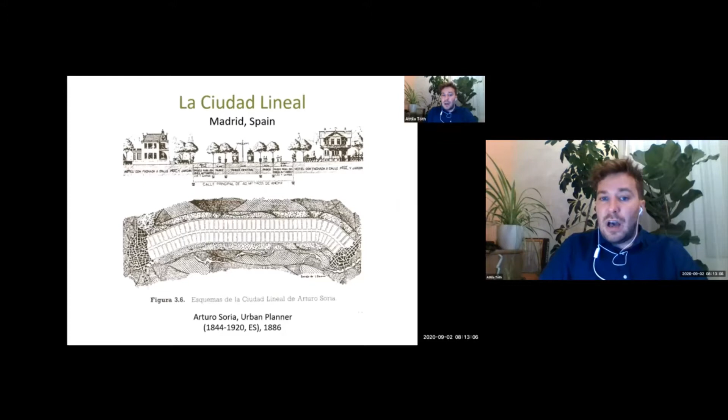The conception of greening cities reaches back to conceptions like La Ciudad Lineal, where you can see green strips and green lines along which streetscapes have been organized.

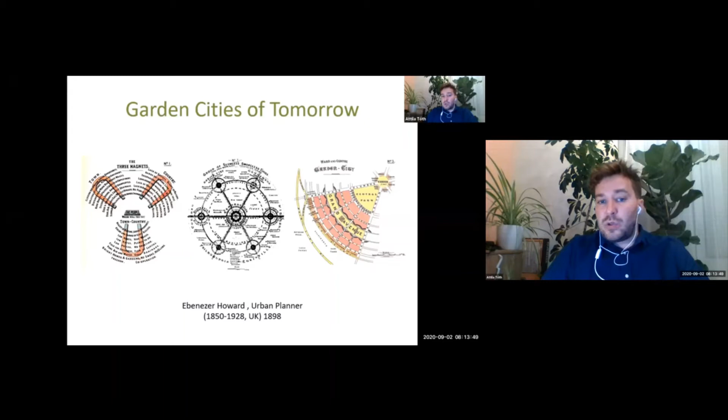Perhaps a little more well-known is the Garden Cities of Tomorrow concept by Ebenezer Howard, an urban planner active in the late 19th century, who came up with the conception of Garden Cities of Tomorrow. This tried to link the qualities of the rural with the qualities of the urban, and the city model included allotments, a grand green avenue, and the central park. So the city was linked with rural areas, which we shall understand as green spaces and open spaces.

This concentric way of planning or modeling cities was quite popular in most European metropolitan cities. For instance, Vienna had this green ring along it, which had a protection meaning before in medieval times. In modern times, when this protection function was gone, concepts of what to do with this area arose, and this made way for the Ringstrasse, the famous green ring, all along the historical city core.

London was similar. There was a plan of the green belts along London, and several green belts divided different urban strips of the city.

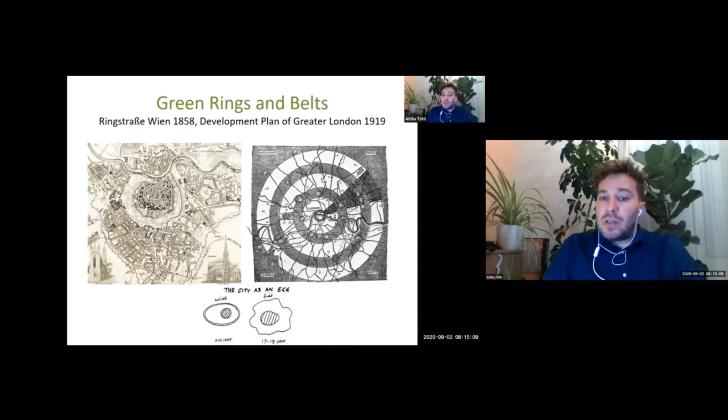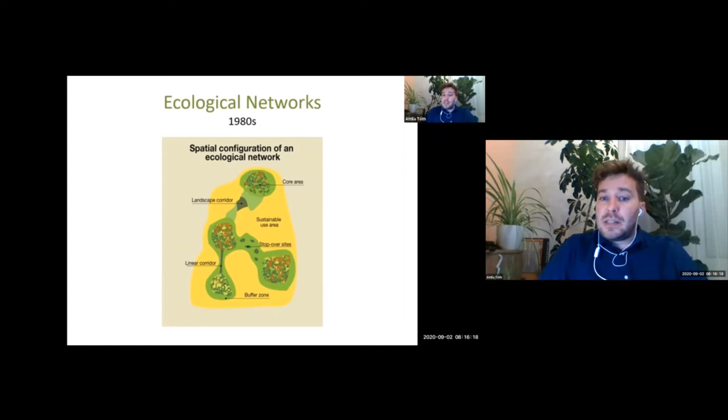Later, in the second half of the 20th century, it was the period of environmentalism and different environmental movements. In this period, the so-called ecological networks developed. For instance, in Czechoslovakia, there was landscape ecological planning, or the territorial system of ecological stability. The ecological network conception was more or less international, based on different core areas and landscape corridors, but the significance of this approach is more in ecology.

A very important aspect of green infrastructure in today's understanding is the multifunctionality. So it's not only about ecology, but it has a very strong social dimension and a very strong economic dimension.

We have a green infrastructure strategy at the EU level, which is linked with all other strategies and policies, for instance also with the Common Agricultural Policy or the new EU Biodiversity Strategy, and more recently the so-called Green Deal, which is an economic concept based on green or environmental approaches to renew Europe in a rather sustainable and green way. This conception is very well linked with more modern approaches like nature-based solutions, which we shall understand as part of a wider image, which should be green infrastructure. And all these provide ecosystem services. So these three terms are very much buzzwords today for the European Commission and also for national authorities.

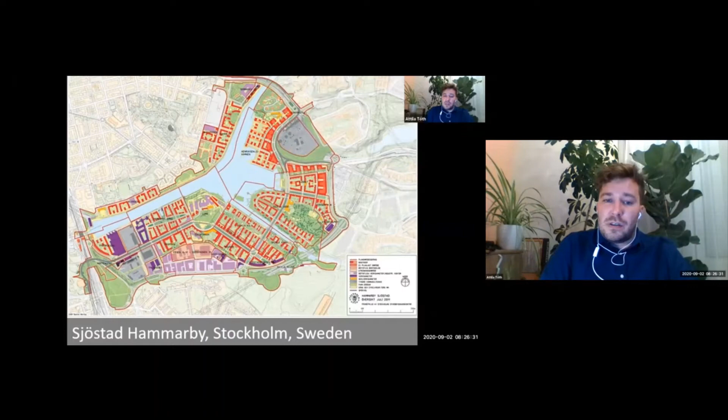This is very attractive for urban citizens who can live just at the water. And of course, this development caused the price and value of the residential areas and flats located in the Sjöstad to become very high and very good for the owners.

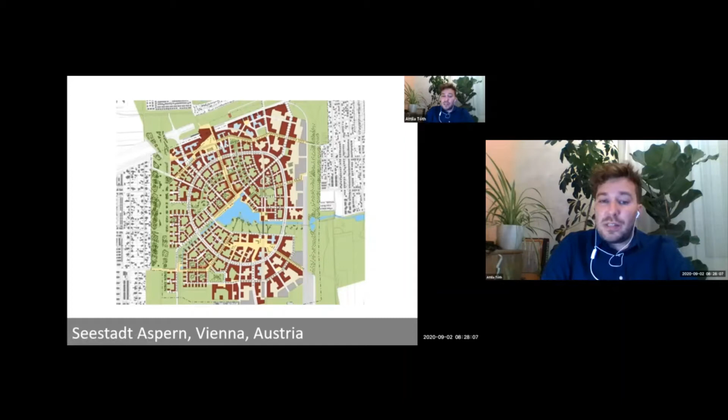You can see another example of Seestadt Aspern, a newer development in Vienna. This used to be formerly a small airport or airfield. What they started the development with was creating this water surface and also joining it with the city through metro. This was the very important step to start joining the city with this district of Seestadt, with the metro line, creating green open spaces with a water surface, and then they started to develop the housing estates all along. They are still doing this now, so the district is still growing and changing over time.

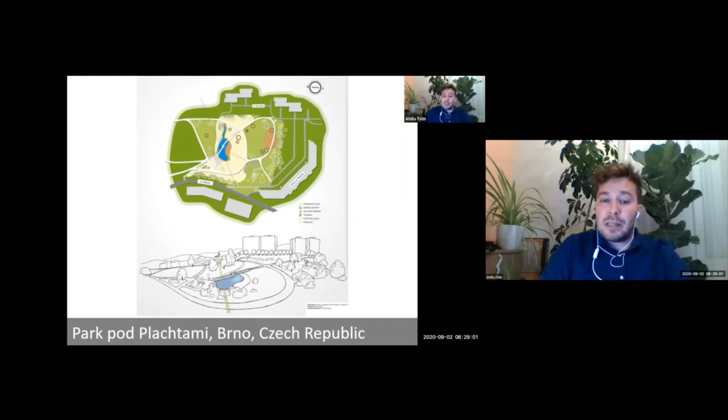When we talk about water, another important aspect in urban landscapes is stormwater management. A good example is the Park pod Plachtami in Brno, Czech Republic. It used to be a typical settlement from the second half of the 20th century, this type of residential estate built in the 1960s, 70s, and 80s. This is the so-called social realism, and many people lived in such flats, having originally moved from rural areas to urban areas to live in flats.

The centralized planning system in Czechoslovakia and other countries of the Eastern Bloc of Europe followed an approach where there was normally, in terms of quantity, quite enough green space, but in terms of quality, the standards were not really high, and now they are being redeveloped. In this park in the Czech Republic, they started to collect all the water which originally ended in the sewage system, collecting it into a central water surface in the middle.

Now it became an element of the open space. Being in Europe, it's also important to talk about traffic, since sometimes traffic cuts cities from their landscapes and nature. A good example is the Rio Manzanares River in Madrid. There was approximately 6 kilometers of highway which cut the city of Madrid from its river Manzanares. There were several strips of heavy road, so people were not really able to get close to the river and enjoy the riverfront.

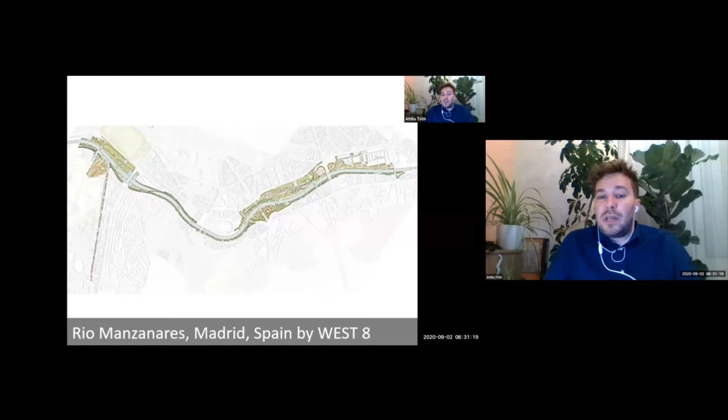The concept of Rio Manzanares was developed by West 8, a famous Dutch office—I guess most of you know it. They developed the conception of a new river park where they put the highway below the ground, all the 6 kilometers approximately, and created a novel urban park on top of it, which some critics called a modern Baroque because of its ornamental shapes.

But the truth is that this project helped to reconnect the city with its river and to create attractive open spaces. You can see parts of the river and interesting examples of how it is managed and used to enhance the open space quality.

In many cities, you have large and attractive open green spaces, and a very good example for this is the Rudolf-Bednar-Park in Vienna. I like to give this example especially because the first thing in the development was to start with the park. Now you have residential houses all along and around the park, but they started the development of a new district, which used to be also a railway station, a big railway station.

They started this development with this urban park. There was an international competition, which was won by Hager, landscape architect from Switzerland. They developed this concept of the Rudolf-Bednar-Park with a very strong linearity. And when the last houses around the park were built, the trees were already quite nicely grown, and the space was already very popular and used by the public.

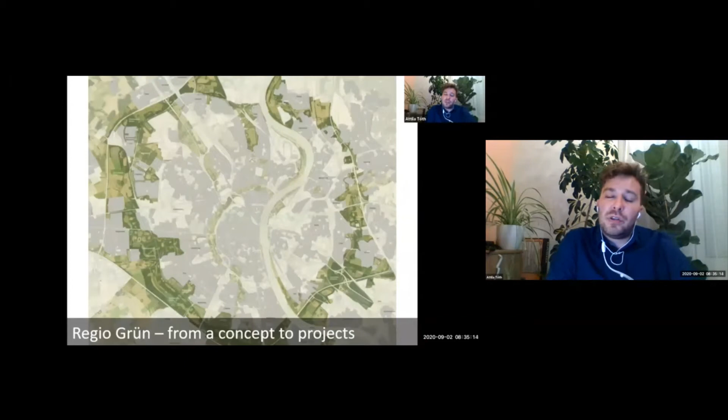I'm going back to the regional structure, to the regional green system of Cologne, which I showed already when I was talking about cityscape planning or about city region planning of green spaces. This is a very good example where you can see the two rings, the two green belts of Cologne. The one is the inner one, this is typical with historical parks, some of them reaching back to the 19th and 20th century. And this strip is more multifunctional with different sorts of parks of different kind.

An example which I want to highlight, there are two parks, both of them located in the outer ring of the city of Cologne. One of them is called the Landscape Park Belvedere, which is located here, and it is known as an agrarian or agricultural park. There was a competition called for this area to redevelop the site, because what you can see here is a highway on this side here on the left, and on the right you can see already some of the outskirts of the city of Cologne, which is mainly individual housing but also collective housing. And here there was some kind of leftover agricultural space, and you can imagine agricultural open spaces are under a very high pressure all over Europe, and especially in such big cities like Cologne.

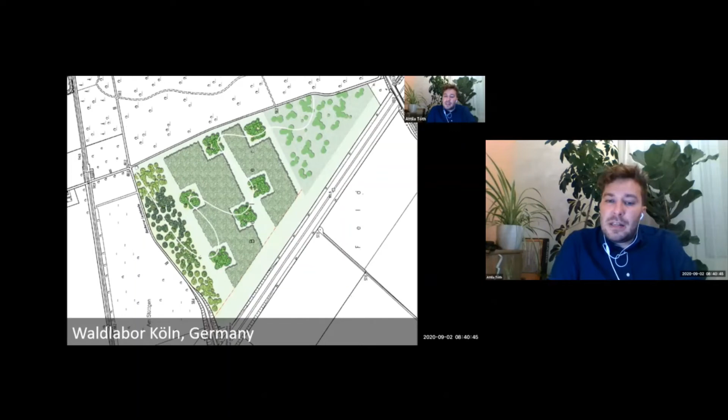In this forest lab or forest park, they are testing different types of green, fast-growing trees and woody plants, which they gradually harvest. So the entire space of the forest is changing from time to time. They are also testing the adaptability of different woody plant species to climate change, how they react and how fast they can grow, and how they react to drought periods. So this is not just an open space, but also a living lab at the same time.

Now I'm getting close to the end of my presentation, and I will go through some different types of green spaces, especially on roofs and walls or highways, and even a vertical park.

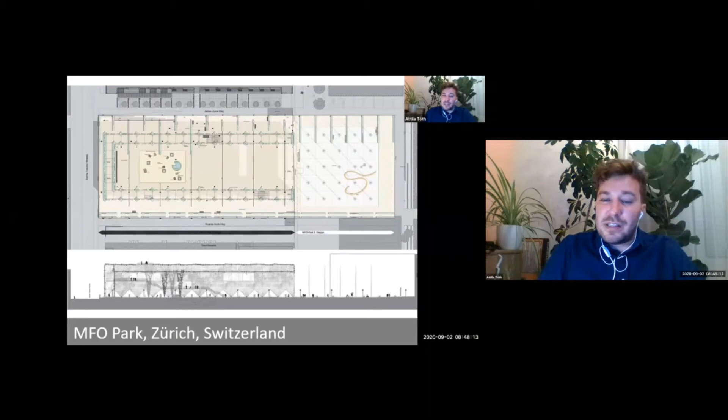This is an example from Zurich, from Switzerland, which shows that parks do not have to be one-floor constructions. Even parks can have several floors, and they can be like a residential building. The MFO Park from Zurich is a good example for this, where in a relatively small scale, quite a significant park was created. You can see a constructed

a construction where plants are overgrowing the construction and creating a green wall system, and you can see several layers and several floors of the park. So the ground floor is used as a very intensive meeting point, and also for shortening ways in the everyday city landscape.

So people can walk around and through the park, and this was very important to allow the use of this site. So therefore, there is not so much green space or green surfaces, but they are using permeable surfaces for the water to enter the ground. And they are compensating in this project the green spaces which they could not afford to do on the ground floor, but they did it on the vertical structures and also on horizontal structures, especially on the rooftop.